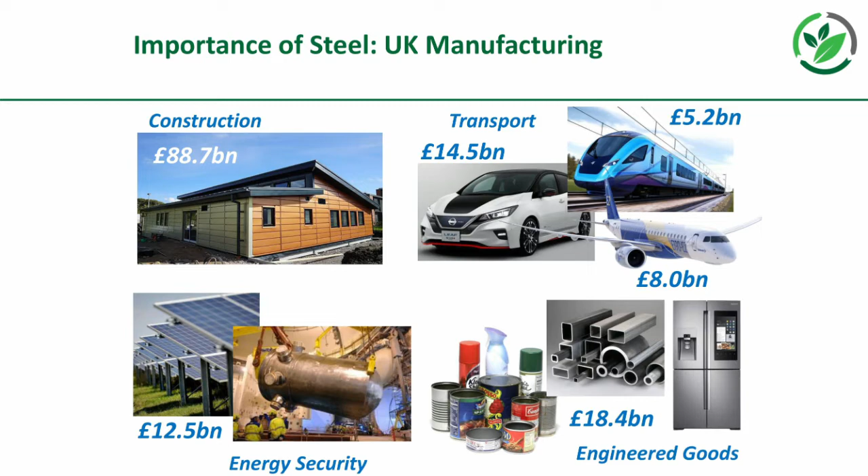So just as a quick intro, for construction you can see the numbers there - 88.7 billion. Energy security, 12.5 billion. Transport, 14.5 billion - 5.2 billion for your trains, 8 billion for your aerospace. And then you've got your commodities, your tubing and packaging, engineered goods, 18.4 billion. So that adds up to quite a long telephone number. And without steel, our economy wouldn't exist, basically. Our modern day existence, the nice lifestyle we have, the freedom of transport - everything is all based on steel.

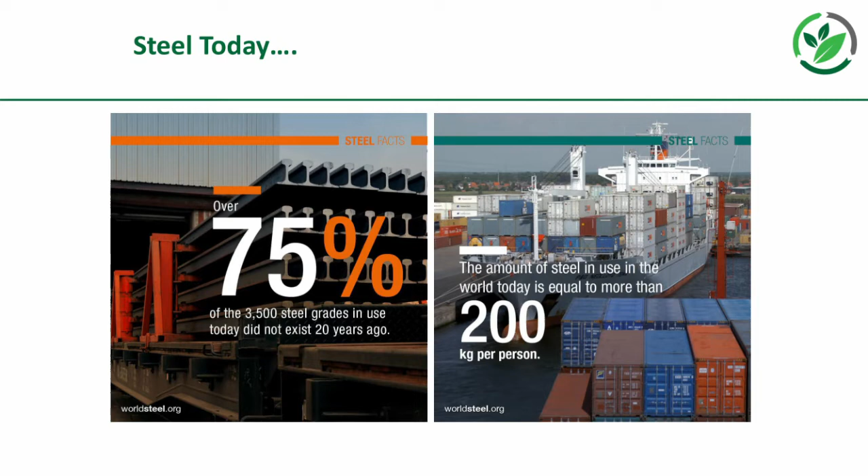So some more facts, taken from the World Steel Organisation. 75% of the 3,500 steel grades in use today didn't exist 20 years ago. Within that 20-year period we've developed all of these grades. I'm going to go back and ask, do we really need all these grades? Because all the elements added to give them these properties make them far more difficult to recycle. We might have to take a step back, have thicker car body parts, things like that. And the amount of steel in use in the world today is 200 kilograms per person. It's unreal. So just take those numbers into account.

There'll be no electric mobility without steel. It's an essential material for construction, and we really need to see if we can reduce the amount of carbon, because it's so widely used, so ubiquitous. The amount of carbon is roughly twice the amount of steel we pump into the air. We're talking over 2 billion tons of carbon dioxide pumped into the air all the time, and we really need to do something about that.

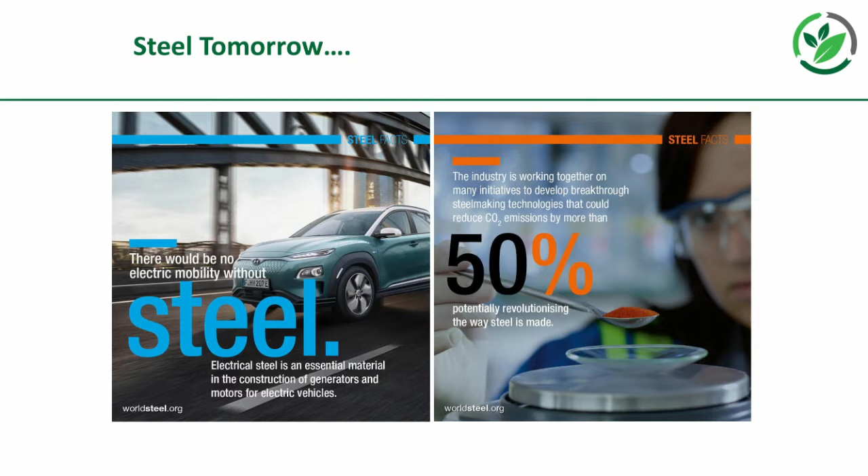If we look now at the UK and the Kyoto target, the blue line is our emissions, and it looks as though we've dropped below that target, but in reality we haven't. We're offshoring a lot of CO2, patting ourselves on the back saying we're doing such a good job, but in reality we're closing down production, losing jobs, losing control in this country, and then offshoring it. So we're not actually having an impact on the CO2, not keeping control of these things.

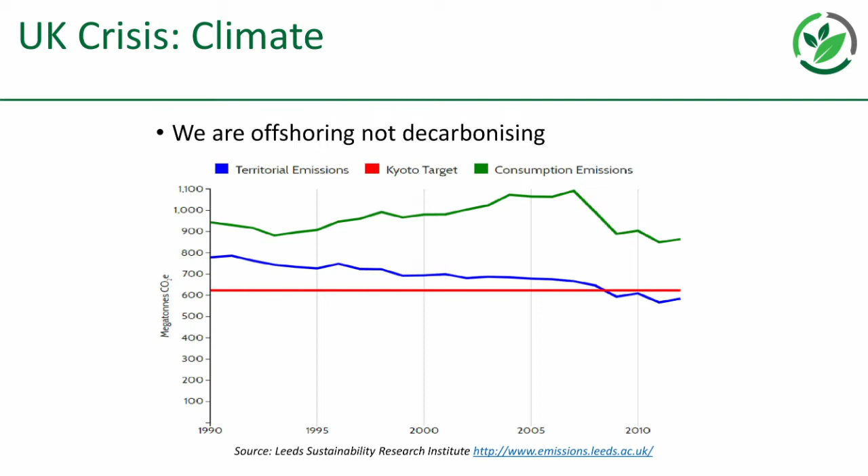It's the Western world, the UK, the States and Europe, that's going to make a difference. I don't think the Chinese and Indians are really focusing on that, they're in a totally different stage of development in terms of industry than we are. We saw recently with the climate convention that wasn't the case. So we need to keep control and make sure we do actually lower the CO2 we emit within the UK.

Another thing not going too well is the energy crisis. As part of this offshoring, we're shutting down power plants and reducing the CO2 we put into the air, but we're not going to be able to cope with the next generation of electric vehicles, electric trains, electric industry. So if we shift from blast furnace to arc furnace, are we really going to be able to cope with that?

Recently in the European electric steel seminar series earlier this year, several companies, one being Liberty Steel, who are having some problems other than this at the moment, were reporting that they were getting spot changes in electricity prices through demand, going up orders of magnitude within days or hours. So they have to stop production.

If we look at the graphs here - if you're interested, it's all published online by Dr Grant Wilson from Birmingham, who keeps a log. This is a bit behind the times, I apologise, but if you look at the most recent data you can see the drop in liquid fuel use around the 2020 period, and you can see how that's picked back up again, but that's due to COVID obviously.

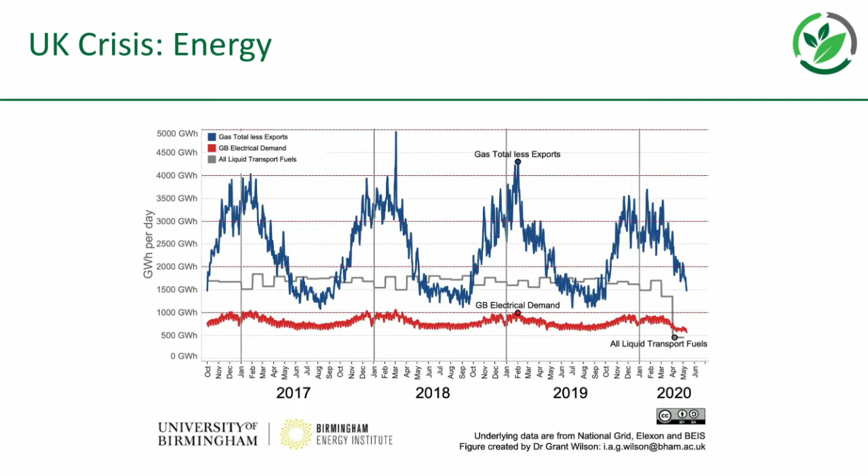On one of the final slides I'll add how that is going to actually stop us from hitting the targets we need to hit, but I'll get onto that later. And of course we've got the plastic crisis as well. We're using a lot of plastic across the world, and it's all being thrown away, ending up in the oceans, landfill, things like that. It doesn't degrade - it's a carbon source.

It could be a second bite of the cherry. We could use carbon capture and utilisation with that. And the other problem we have, that I haven't put a slide up on, is fossil fuels. So the oil we use for petrochemicals and pharmaceuticals, plastics, that sort of thing. If we stop oil production, we're going to have to get the carbon from somewhere else. So where do we get that from? Can we use CO2? Can we get the carbon from the CO2 to actually replace that?

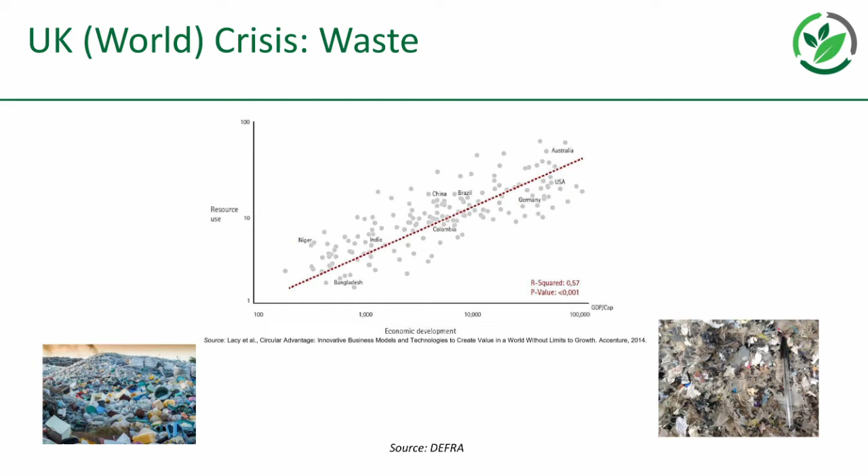It's one of the projects in Sustain, as you'll see, but we've got a lot of work to do to get where we need to be. Sustain's part of a bigger set of projects that include Comet and the Rapid Alloy Prototyping Project based at Swansea. We also have, so that's developing new alloys, new alloys with more additions, and also alloys with less additions, where we use heating and rolling techniques to get the same properties without using these alloys.

We also have the specific project, based on printable photovoltaics, rather than making them from silicon, which is very damaging to the environment. You've got to dig the quartz up, you've got to process it, it takes a lot of energy to do that. Some photovoltaics, you'll actually get less energy out of them at the end of the day than you put in to make them. So having something that's polymer-based, inkjet printable, printable on steel, which has been trialled successfully, is one of the alternatives.

And the ABC project, Active Building Centre - there's been a street of houses put up for low-income families in Neath as a trial, where they have basically zero energy bills due to novel uses of steel for heating, and also a technique using a salt with vermiculite that has an endothermic/exothermic reversible reaction - basically a water absorption reaction. In the winter, when the cold, wet air comes in, it starts the reaction off, and in the house they get hot air, warm air, and then in the summer it dries back out again and has a cooling effect. So it's little bits of technology like that all put together.

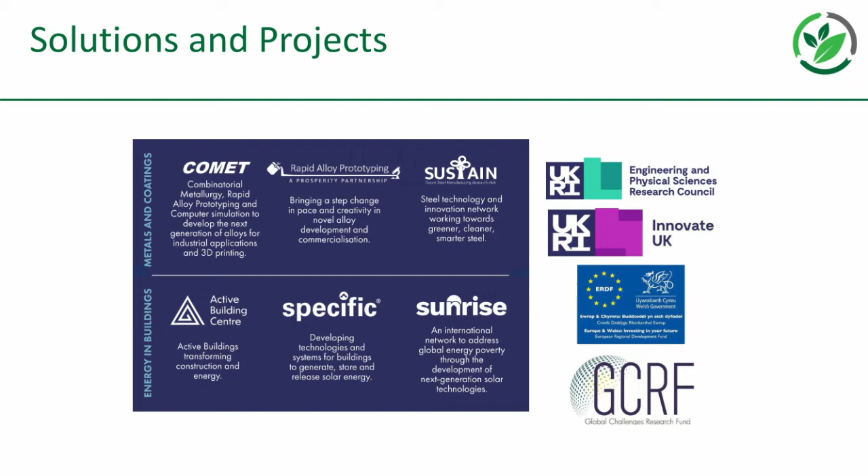So more about Sustain. We're very lucky to get Sustain. It was an EPSRC project, and EPSRC don't usually invest in steel. So it's government funding, low TRL, and it's a 7-year project. We're about 2.5 years through now, and it's 32 million over 7 years. 12 million is from EPSRC, and the rest has come from industry and local authorities, things like that. We've got all of the major steel companies in the UK - Liberty Steel, Celsa, Forgemasters at Sheffield, British Steel and Tata Steel are all part of that project, and they've all invested quite heavily in it.

And the point of the project is to do two things - we've got two grand challenges. The first challenge is to basically find a solution for net zero steel making and net zero carbon steel making, and also what we call smart steel making, using the latest digital technologies to link things together - supply chain, artificial intelligence - to actually make the processes more efficient in terms of energy use and other things as well.

So the project itself started with the core of Sheffield, Swansea and Warwick. Swansea's what we call the hub, and Warwick and Sheffield are the spokes. And as the project's grown, we've increased.

So Durham University - Andrew Gallant, who's giving a presentation in the future, him and Alton Horsfall have been developing high temperature technology for measurement in steel. They've got up to 700 degrees without water cooling, no power - it's an RFID type system - and they're working on technology that will provide similar sensing at up to 2,000 degrees without damaging the electronic components. So it's quite novel technology, because steel's one of the industries where it's so hot that you can't use the same measurement and analysis techniques as in other chemical-based industries. So that'll be a big gain, plus the digitization that we're bringing as well.

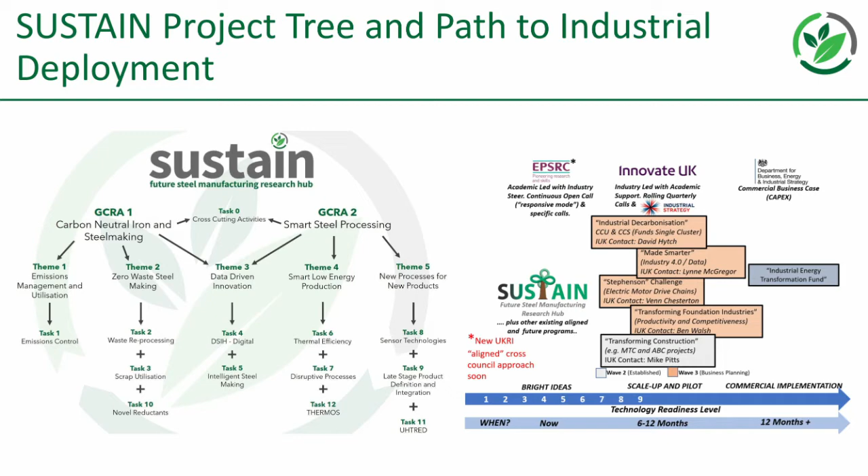So our motto is steel's not a problem. Steel's got this Dickensian connotation to it, and it's seen as a big problem - let's just shut all the plants, because if we do that, then we'll get rid of the CO2. We say steel's a solution, not a problem, and it can be part of a solution to decarbonisation and the climate crisis.

By basically valorising the internal waste, reprocessing external byproducts - you can see the list of projects here - becoming decarbonisation hubs, increasing scrap recycling, and we're going to provide a solid base to build a smart steel future by integrating conventional modelling and data science, game-changing sensing technologies, and novel metallurgical processing.

So we see ourselves as being potentially a solution to a lot of the problems that we have in the UK at the moment.

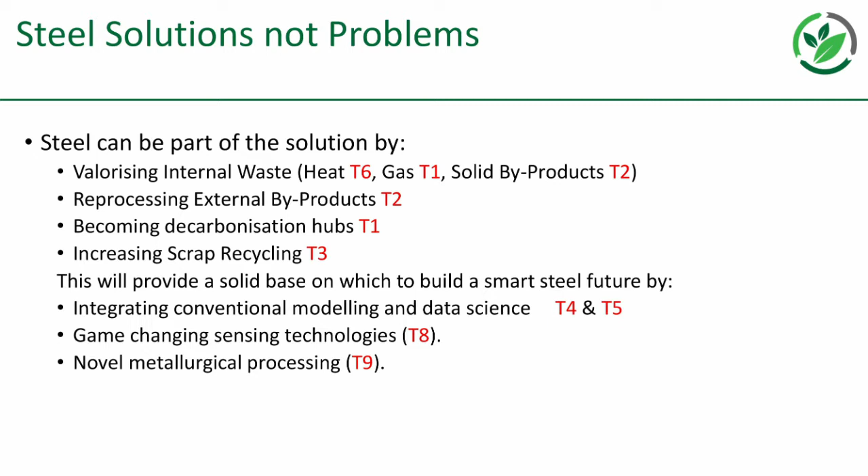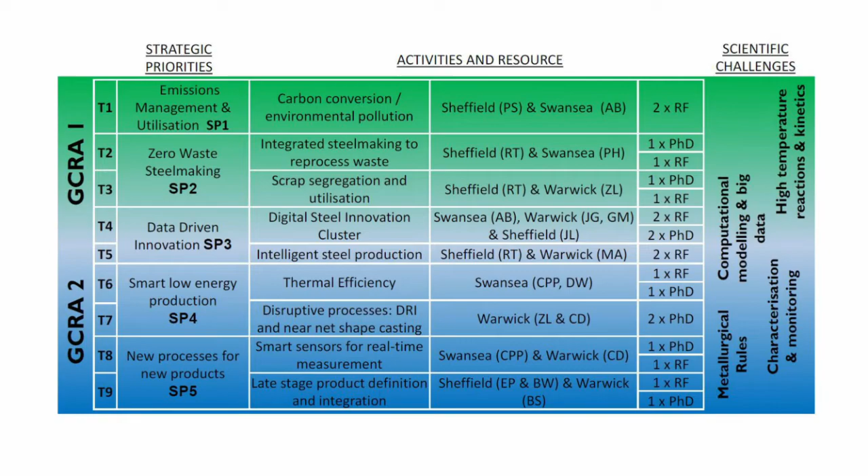This is just a quick slide to show how we're doing as a project. The slides will be shared, you can read through those later. And another list of the projects there.

So now I'll start with some of the interesting stuff. Task 1, the Carbon Conversion Environmental Pollution Project, led by Andrew Barron and Enrico Andreoli at Swansea and Peter Styring at Sheffield. Basically, the whole point of this is can we sequester the carbon dioxide and use the carbon embedded within it for other things.

So it's a two-step process. You need to get it out safely, you need to make sure that you get rid of the nasties, and then you can start doing something clever with it. There are various technologies being used at the moment, such as amine technology, which aren't suitable for steel making because of temperature and pressure swing issues, and the nasties in there can damage the catalysts that do the clever stuff with the material as well.

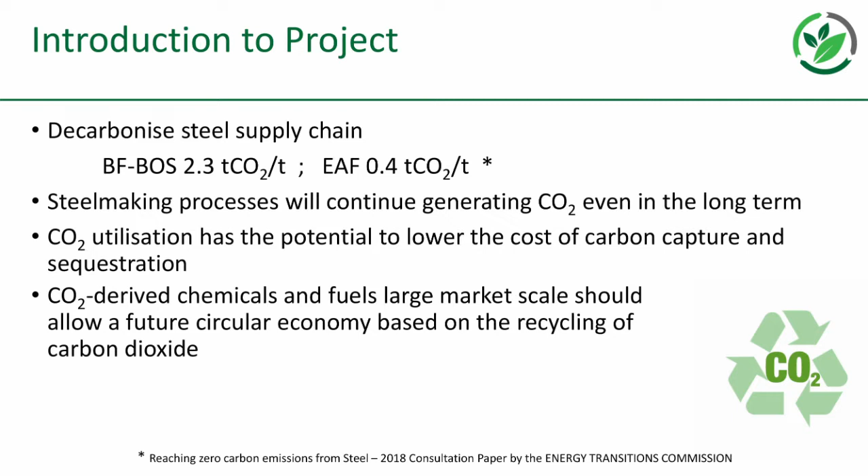We then need to find either bio or electrochemical ways of producing the useful products to replace things that we currently use carbon from oil for - basically take the carbon dioxide from the steel industry and turn that into fuel and chemicals.

And the great thing about steel is it's a fantastic point source. You hear in the papers about companies taking carbon dioxide from the air, but there's a very small percentage of carbon dioxide in the air - I think 400 parts per million at the moment. Wouldn't it be much better to go straight to the source and suck it all out where you've got a very high percentage of carbon dioxide, rather than wait for it to get into the air, diffuse, and then try and pull it out.

So that's what we're really going for. In the UK, we've only got two integrated steel plants now, unfortunately - we've got Scunthorpe, now British Steel, owned by Jingye, a Chinese company, and we've got Port Talbot, which is Tata Steel, owned by an Indian company. But they're still going, still in the UK, still making steel.

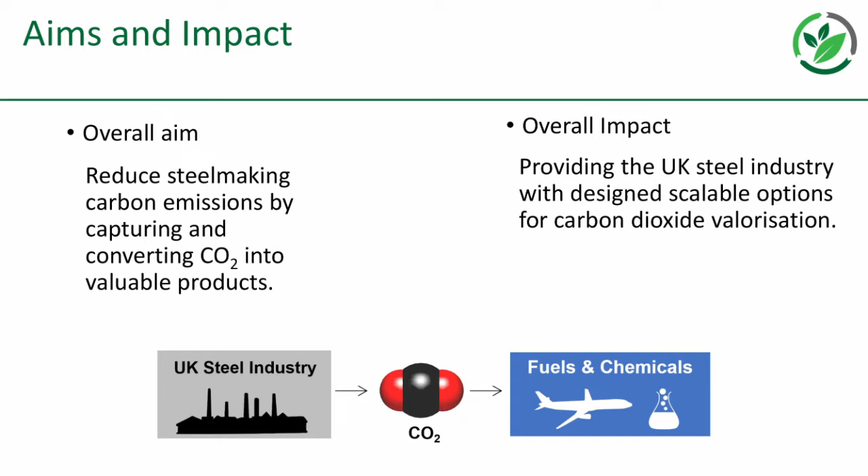So we've got two sources that we can stick these systems on, and we can start to prove to the world that you can actually have integrated steel making and use the byproducts for useful things rather than letting them go into the air and vent off.

So the aims and impact of the first part of the project: develop, build and operate a pressure temperature swing adsorption unit with purposely designed sorbents, higher CO2 separation selectivity, lower energy penalty, and deliver separation units and sorption materials for efficient carbon dioxide capture from gas mixtures specific to steel making.

So this project's been going for a couple of years now, and it's reaching its maturity. It's getting to the point now where it's either going to be spun out through an Innovate project or given directly to industry.

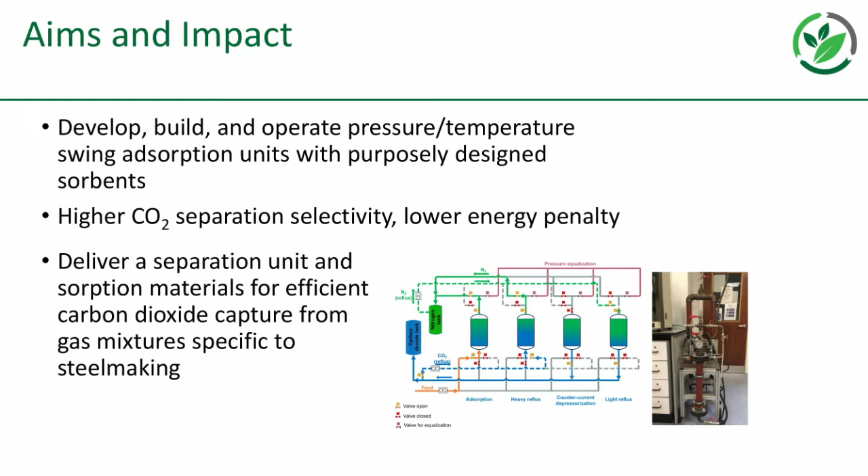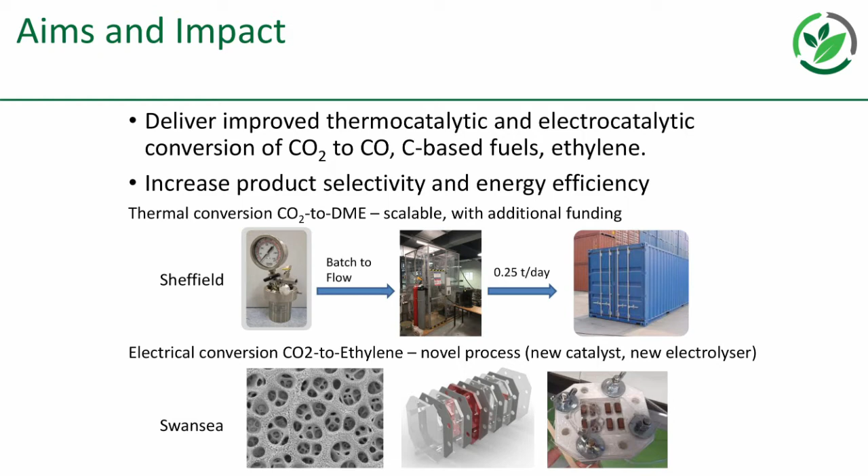The technology that's used - initially they started with electrical conversion of CO2 to ethylene using a catalyst process, and that was proven to be very successful. The energy used is far less than a lot of the other processes that are currently used today or in research today.

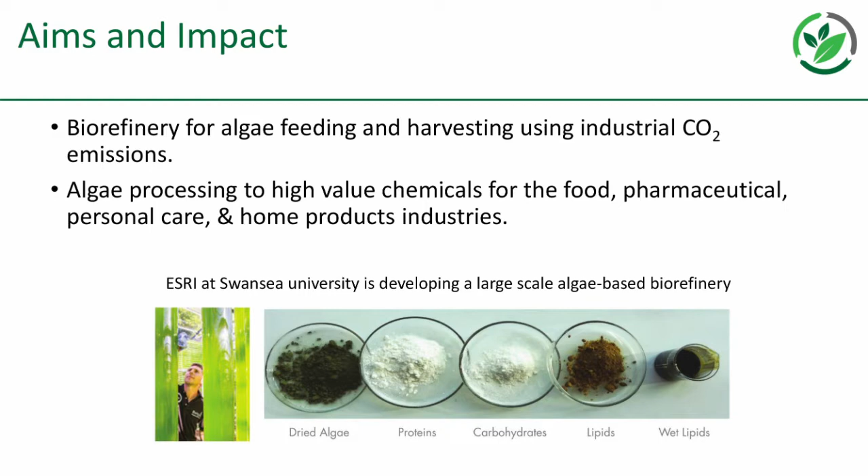And then they were also looking at bioreactors as well. So you basically have a big tank full of algae, you pump the CO2 in, and they're converted into various things that you can then refine and make into useful products.

So where this is now - the capture side, the non-amine based technology is actually suitable for variable pressure, and it's going really well. They're at a stage now where they're building, it should be finished in the next few weeks, a demonstrator, and that'll be doing a tour of the UK. It'll be going around different plants, different steel plants. They're actually going to go outside of Westminster and pull it out of the air as well, just for giggles.

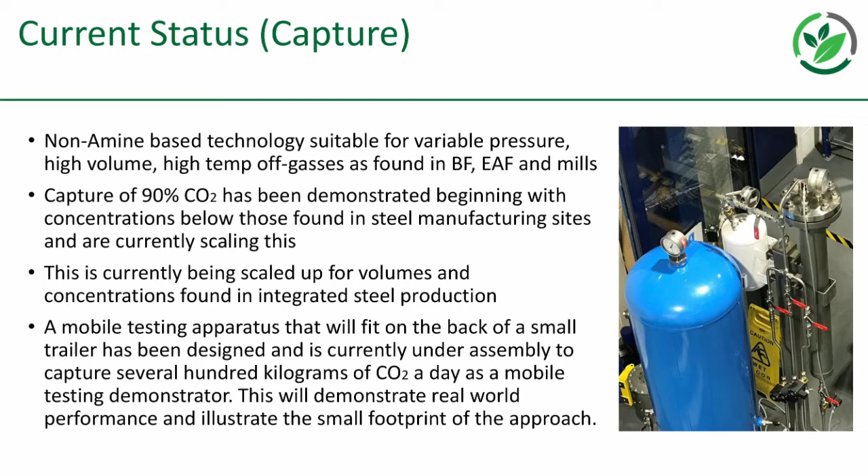But it's at a point where we can really start to get the message out, get the investment into the project, and start to scale it up. But the actual proven side of it's pretty much finished.

And then on the utilisation side, there's a successful setup. I mentioned the ethylene production through the catalyst, so that's been proven. And then we've got this other system with the algae - there's a bioreactor set up in Vale, a nickel refinery in South Wales. And yet again, it could be put on skids and be moved about, and that's going to do a tour of some of the steel plants as well. We hope to put both of the units together as a full demo, and then take it from there.

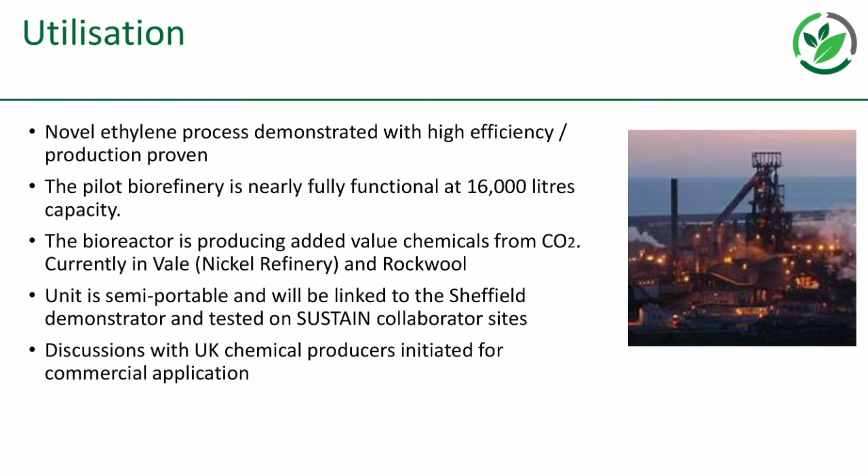So this is a system that'll take the CO2 out of the blast furnace or the mills or the BOS plant or wherever, and actually before your very eyes, convert it into something that's useful and can be used. But like I said, I'm not sure if I would eat the protein that they make from the algae.

So the second project I want to talk about - again it's a Sheffield Swansea project. The two researchers are Ulrich Jones and Fazwaz Ojabali, with Richard Thackeray as the primary investigator at Sheffield, and Peter Holliman at Swansea. What they're looking at is, can you use plastic waste basically in some sort of process form? It's actually plastic and paper, a bit of a mix.

So it's stuff that would end up in landfill, stuff that we throw out probably every day within the green wheelie bins or whatever, or the blue ones, whichever system we have. Basically that needs to be processed in a way that mimics how coal goes into the blast furnace. I don't know if I'm assuming everyone here knows roughly how a blast furnace works, but you do need to give it additional fuel, and they usually use pulverized coal.

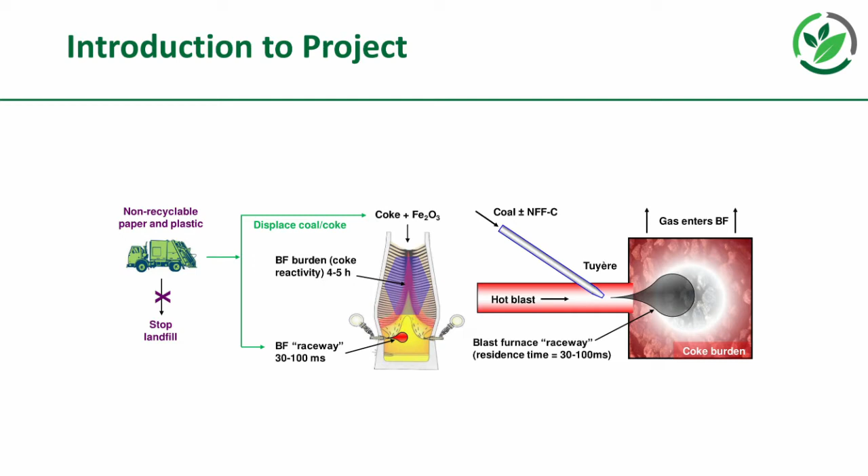And that's put through what they call a tuyere. This is a project where, on a lab-based scale, they've been simulating the tuyere and looking at how basically the carbon burns, and the differences between the pulverized coal and the stuff they're producing from plastics and paper. The idea is that there'll be potential financial savings.

So landfill of this stuff is like £120 a tonne. So effectively you're getting a saving of whatever the cost of coal is for an equivalent amount of plastic, plus that £120 a tonne you would normally pay for landfill. So there's a financial saving, but also a carbon saving.

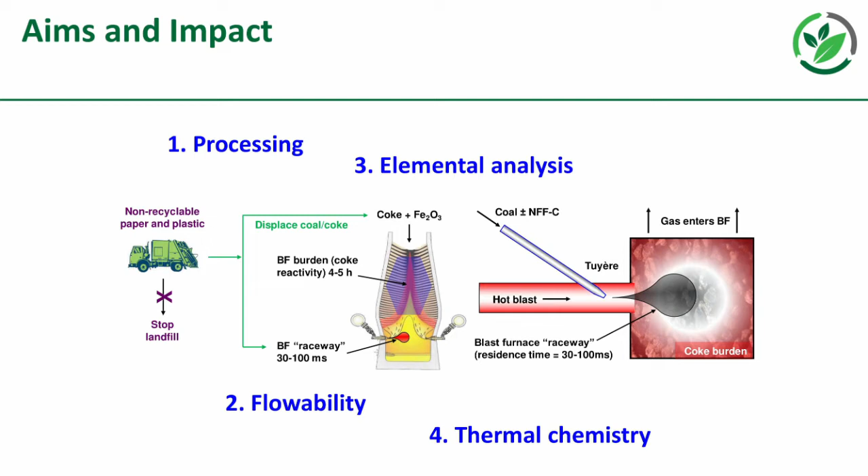So if you then combine this with the previous technology, you've got something where you've got the second bite of the cherry from the plastics and paper, and you've also got the ability to pull the carbon out and reuse it again as something else - as a protein, or you could even make plastic again out of it. The idea is you'd have that efficient cycle - you won't have to keep using oil, and you won't have to keep getting virgin materials and putting it through the process.

So the next project is wholly a Warwick one in terms of the practical side, and Richard from Sheffield's working on the LCA analysis, that's life cycle analysis side. He's looking at, instead of what's usually done today with cars, where for many years they've been doing the life cycle, and that's where the weight of cars comes down by alloying the steel in a certain way to give it higher strength, so you can have thinner steel with the same ductility, and reduce the amount of carbon dioxide put into the atmosphere by the reduced weight of the car.

What Richard's doing is rather than look at one life cycle of a vehicle, he's looking at an infinite life cycle. That brings questions in, because if you then have to recycle it, it becomes more difficult because you've got these alloying elements in, and you could get to a point where you've got a negative gain. So this is all integral to looking at the far future rather than just the next 5, 7, 12 years.

So there's the scrap project at Warwick. As I said, I'm doing some of the things on scrap as well. But the main thing is to look at the UK generated steel scrap and actually use it in a way that's strategic for the UK. As I'll come on to later, we actually have a surplus of scrap compared to the amount of steel we make. Unfortunately, we still use more steel than we accumulate scrap every year, by a factor of about 2. So that will start to level out - the amount of steel we use will come down, and the amount of scrap we generate every year will go up, and they'll meet at some point.

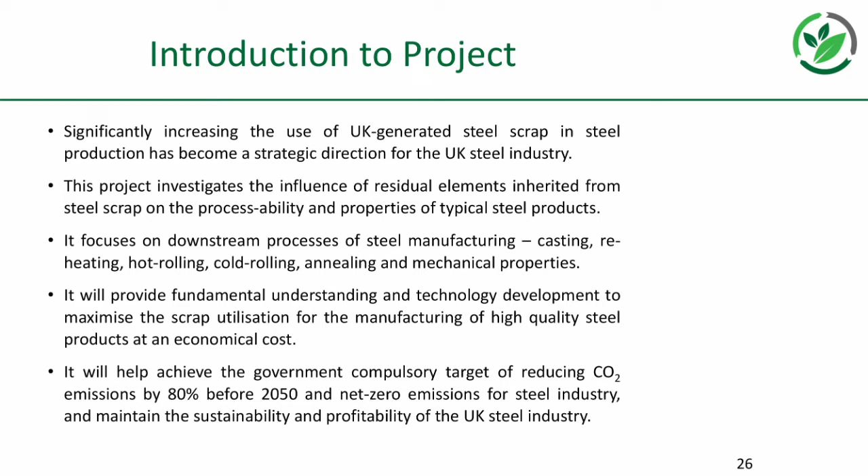So I don't know if anybody knows how tin cans are made. Basically, they get a sliver of steel, like a beer mat, and it's punched out into shape in one go. If you have too much copper in there, it hardens the steel, stops it being as ductile in certain areas, and then you get cracks, splits and tears. They want like 1 in 10,000 to rip - that's okay, but if every 3 or every 1 rips, then you've got major problems, and they'll just send the steel back.

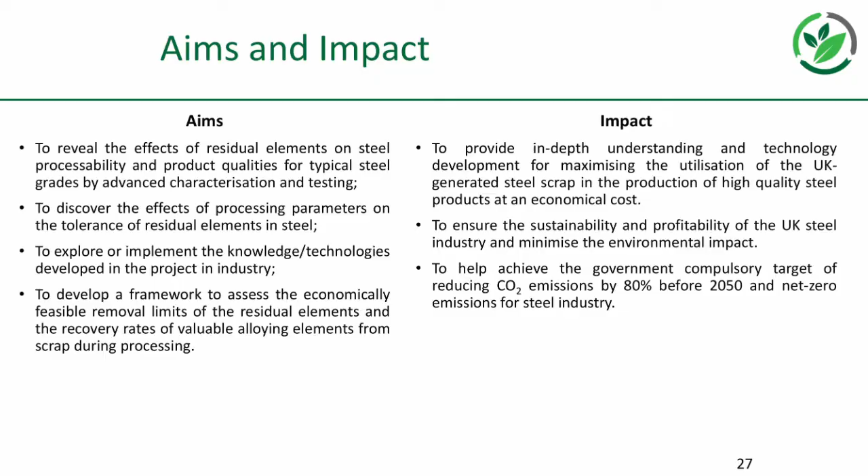He's looking at not only generating electrical energy from the heat, but also how we can extend the lifetime of refractories as well. And yet again, refractories come from virgin materials dug out of the ground, so can we find some way to reuse them? Usually what happens is they get mixed up with some of the slag and used to make tarmac for roads, that sort of thing, or it's landfilled. So yet again, it's another waste - we're digging something up, using it, consuming it, and throwing it away again.

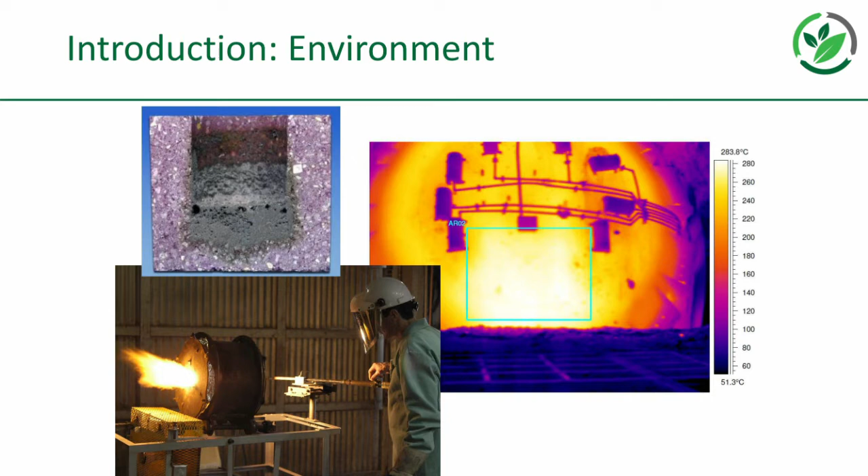So that's just a picture of the thermopile, the refractory thermopile that would be installed within the refractories of a ladle, and then obviously you generate a voltage from the temperature difference, and if you have enough of them stuck together, you get a parallel sort of current from that which increases the current.

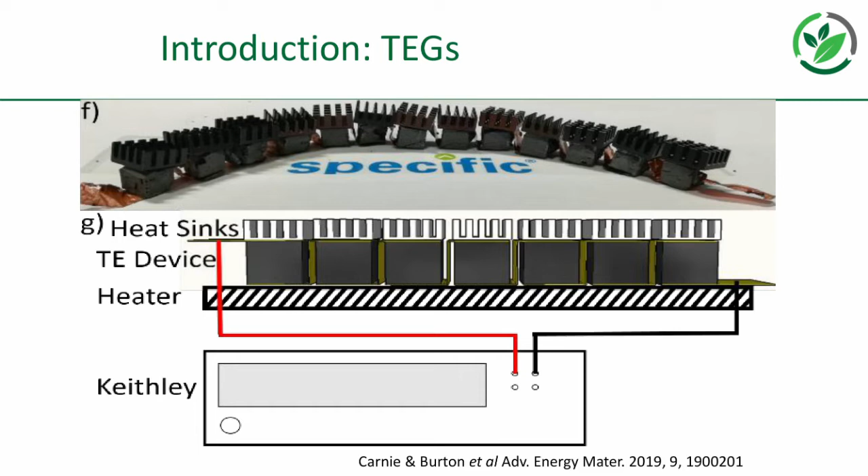So it's basically - I'm trying to think of the word now. Oh, it's gone. Anyway, you know, like a temperature measurement system where you've got two metals. Thermocouple, that's the one. Yes, thermocouple.

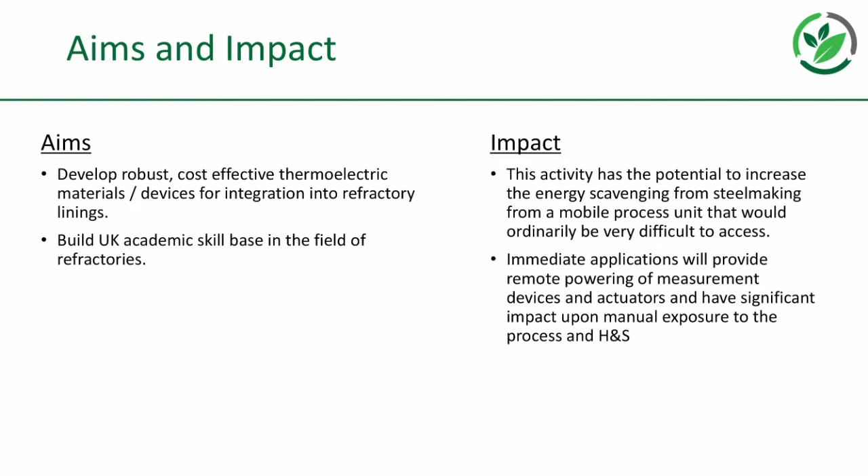There's a lot of problems with hydrogen-based technologies. One of them is actually getting the supply of hydrogen, especially if you're not going to use natural gas to do it, which is wasteful. You can do it through electrolysis, but it's roughly 60% efficient, so you're losing 40% of the electricity you're putting in. You might as well use electricity and melt scrap if you're going to do that. There's that side of things, but also hydrogen behaves differently to natural gas, and you've got a lot more water formation within there, which can cause problems as well. So Zushu's got a PhD looking into that at the moment, and we're linking up with world leaders who are really looking into the uses of hydrogen for DRI, trying to learn as much as we can about it and bring the knowledge into the UK.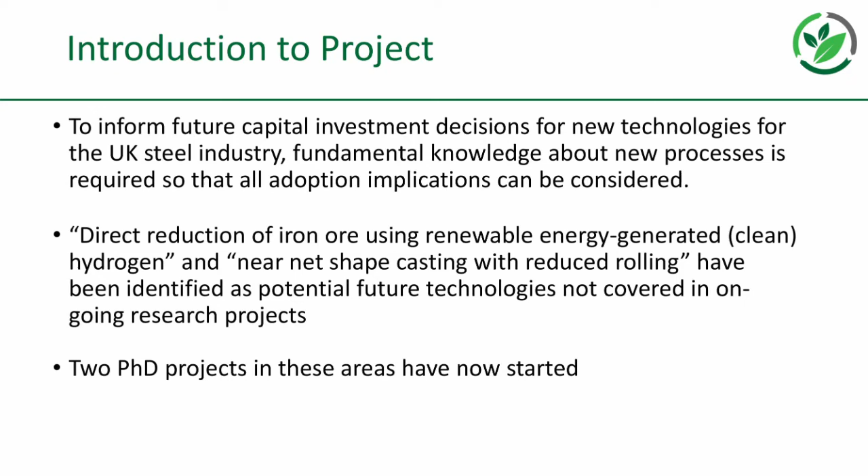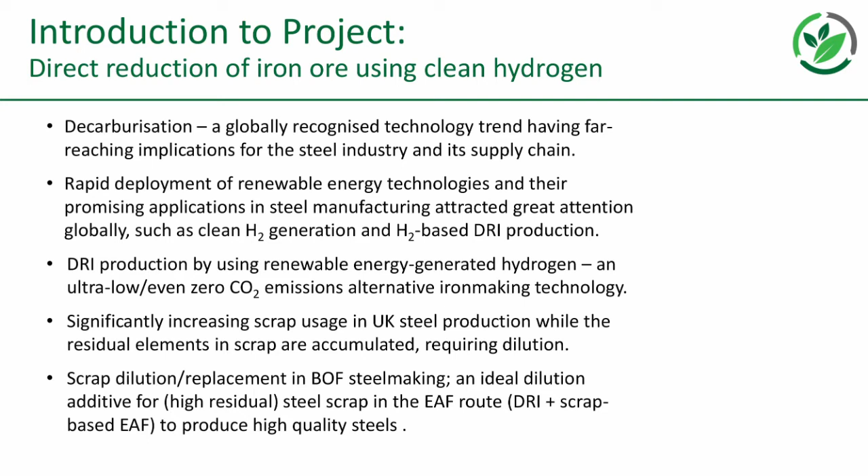And then we've also got the other project, which is looking at different forms of casting that can be more energy-efficient, but also overcome problems you might have with traditional casting methods in terms of casting highly alloyed metals due to residuals from contamination from recycling.

And then the last one I'm going to quickly talk about is this late-stage differentiation and integration. This is a wholly Sheffield project in terms of the practical side, and then there's a PhD working at Warwick with Martin Strangwood. Mark Rainforth there, really good guy - he's a world leader in this sort of thing, does a lot of work for the nuclear industry, that sort of thing. And one of the spin-outs of this project is actually going into the Neuron project, which is looking at nuclear fusion. And Eric Palmiere, yeah, again, he's another world expert based at Sheffield.

So it's all about improving product uniformity along length and cross sections, microstructural evolution during hot deformation, and novel innovative heat treatment to reduce heat treatment costs, with and without alloy design. What's happened over the years is we've gone away from mechanical and heat treatment and, I wouldn't say cheated, but we've put what we call microalloys in there that give you the properties you want without having to invest in roller mills and heat treatment.

This was something British Steel really pushed back in the good old days, before it was Corus and then Tata. As a cost-saving measure, it was a short-term win, but long-term it hasn't really benefited the company, I don't think.

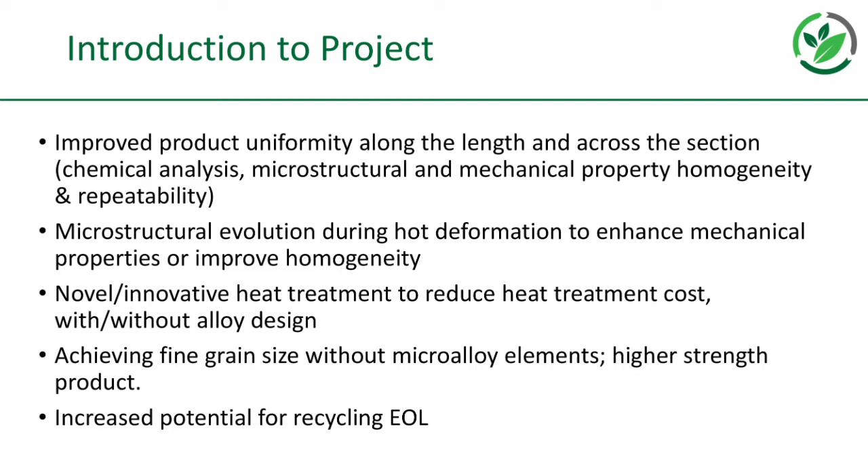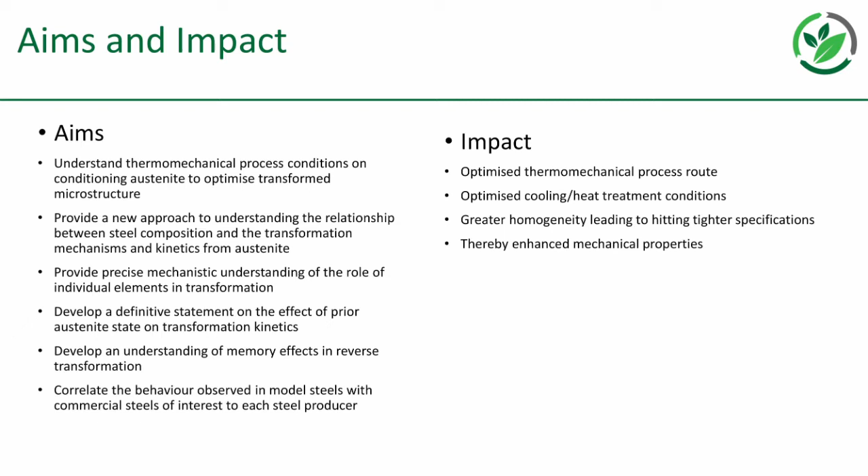And looking to the future, looking to recycling, it's definitely not the right model, because we're increasing the amount of contamination within the steel that we need to recycle. The last point is increased potential for recycling - if you can control the grain size and properties of the steel through heat treatment and rolling, you don't need to add all these elements, and you don't have the problems you'd have otherwise with these alloying elements when it comes to recycling.

So steel is a solution. I've covered some of these things already, but plastics and paper can be used as fuel. We can couple that with carbon capture and storage utilization to minimize emissions - something we're really focusing on in sustain.

And then we've got greater utilization of steel as a packaging material - something we're really promoting because steel's so versatile and so recyclable. Why would you use things like plastic? The cost is potentially lower, you can get steel to a really thin state that's going to be light, it's going to be useful.

I think we've seen that a lot more - there's a lot more packaging now. I've seen cans of water on the shelves and things, just moving away from that overuse of plastic. I don't think we'll have steel carrier bags, but I don't know what we're going to do with carrier bags, because they just seem to be everywhere, don't they?

But as I say, I think steel itself can have a massive impact on the plastic crisis that Attenborough sort of brought forward a few years ago. Because if you look at the state of the streets, look at some of these pictures of quite exotic locations, the Arctic and stuff, it's absolutely covered in plastic. It's destroying marine life. Some of these plastics break down into nasty chemicals that mimic hormones and are causing issues not just in wildlife but in human beings as well.

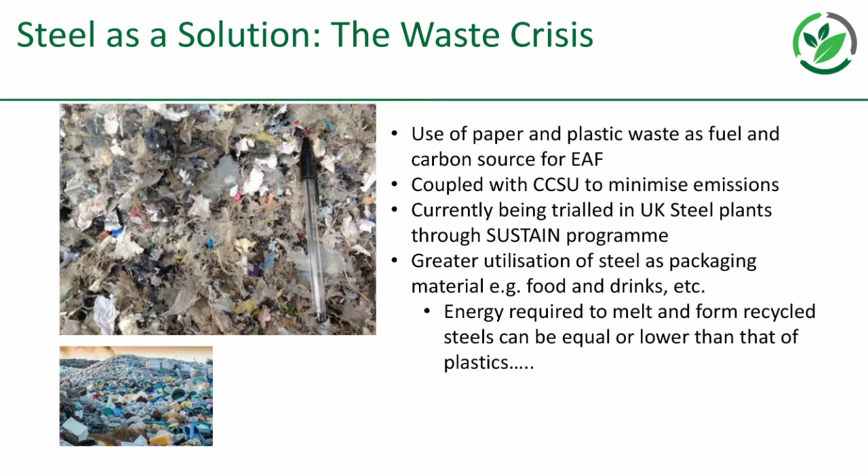So the circular economy.

Recycling versus mining, transport, virgin steel production. If we really look into the decarbonisation side of things, if we can use our own natural resources in terms of scrap and waste, we don't need to start bringing virgin materials right the way across the globe. We get our iron ore from Australia, coal from Australia and various other places - what's the carbon impact of that?

I didn't think it was controversial, but a lot of people - I was on the side of that Cumbria mine opening, because it's bringing jobs, it's less transport, and all, as you saw on that graph earlier, we're really doing is putting the burden on other countries and saying, oh, what a good job we're doing. We're still using the same amount of carbon, so why not use our own natural resource?

And obviously, I come from a coal mining background - grandfathers were coal miners at Horden Colliery. If we do it right and capture the carbon at the end of it, is that so bad? It's better than all the stages of digging out of the ground, transport. When it's dug out of the ground in some of the third world countries as well, I'm not sure if that's the correct term anymore, but you don't know what the conditions are - you could have child labour, you could have all sorts of things going on.

At least it's under control, health and safety is right, the transport costs are really low, and we're using our own sovereign capability. And if you look at what's happened after COVID, that much reliance on China for things - we need to start bringing things back into the country, because if they switch the lights off, we can't switch them back on again.

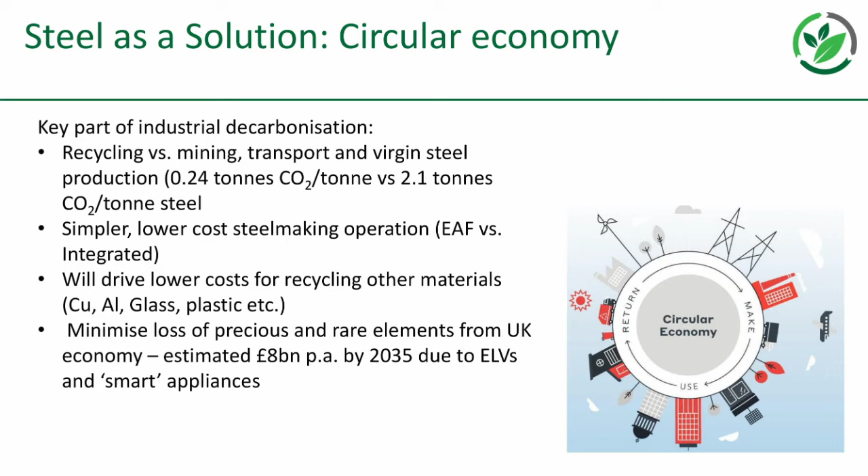So, yep, carbon capture and reuse. The oil industry is really negative now, it's on its last legs - not because we're running out of oil, but because public opinion has shifted against it. All you can see is decline, and fuel prices going up, it's going to be crazy. We need to start really looking at what we have at home and how we can reuse that for practical means.

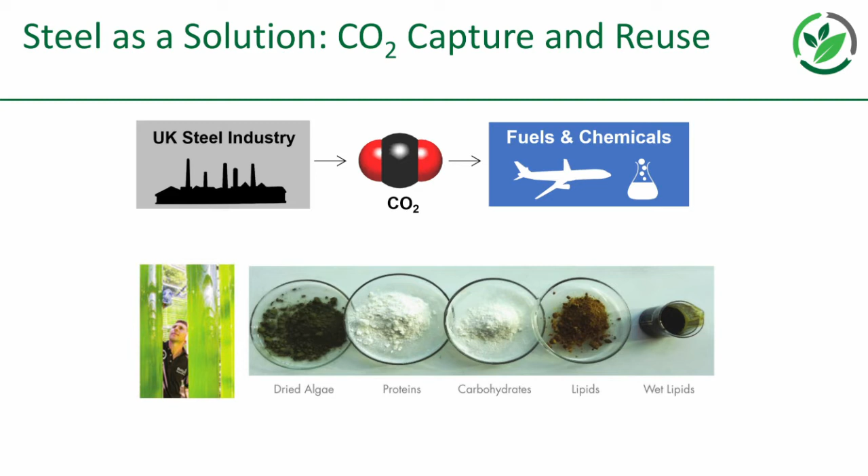And then the hydrogen economy - one really interesting thing about the blast furnace is you can actually use it to generate hydrogen. Tata Steel was involved with and championing the SEWGS process, which effectively reacts CO with steam to produce hydrogen. The calculation was something like 300-350 megawatts of hydrogen for a large blast furnace. Compare that to the Fukushima Hydrogen Energy Research Centre - 180,000 square metre site, cost $2 billion, and they get 10 megawatt hour H2 output, which powers about 60 cars. So just an investment of $500 million, and you've got orders of magnitude more hydrogen, and we've already got the blast furnaces. Why don't we utilise them for that? Kickstart the hydrogen economy, rather than wasting money on renewables that aren't maybe as developed as they need to be.

And then you've got to think as well, why not just use the electricity? Because 60% of it is going to be used to produce the hydrogen, the other 40% is lost. So to me it's a no-brainer, but it's quite difficult to convince people it's the right way forward.

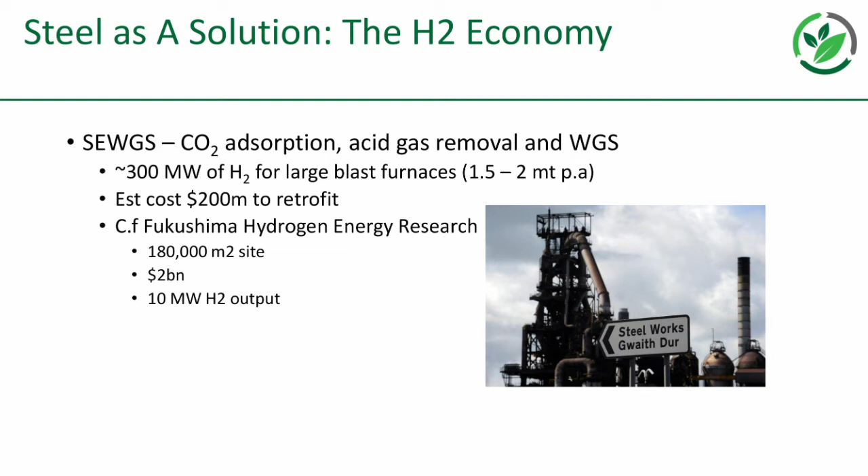And then steel for nuclear fusion - that's the new thing. Was it 2070? They said we might have a reactor that lasts 5 minutes or something like that - they've proved it lasts so many seconds. And obviously fission as well. This is another one people hold their heads at when I mention it, but we've got an opportunity to use these small modular reactors, and to produce them we need steel. So steel could be a solution for that. We've roughly got about 500 years of energy from depleted uranium - that could be enough to get us to the next stage. I really do think we're going the wrong way in terms of shutting the lights out with fossil fuels well before we're at the point with renewables that we can actually rely on them and produce them with an amount of energy significantly less than it takes to produce the things in the first place.

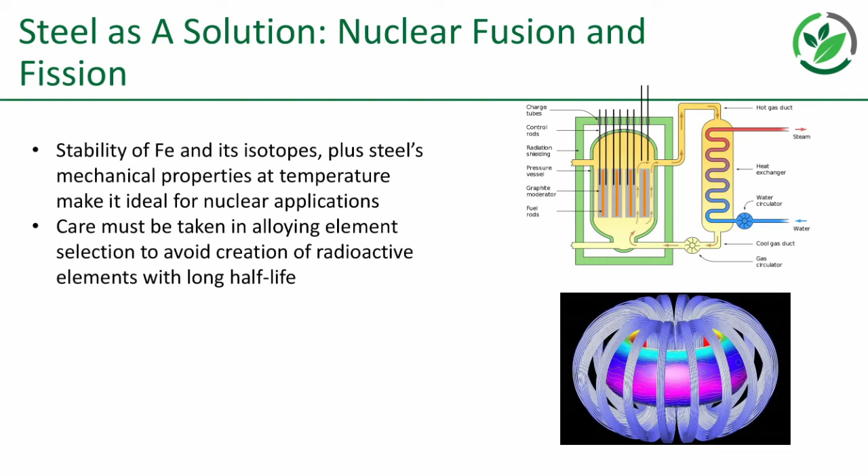So, future for the northeast of England - it's been quite dire. If you think back, there were steel plants at Hartlepool, Consett, Teesside obviously, and I was involved when they tried to relaunch Teesside as SSI, and it was quite sad to see how that went in the end. They would probably still be here if it wasn't for the steel crisis in 2016 that was caused by dumping. It was quite a sorry thing - they had a really good business model, but it's all gone now, and we really need to start from scratch if we want to bring it back.

And I think to do that, we need to start looking again at the UK. We've got a wealth of low quality virgin ores in the UK - the Cleveland Hills are still full of iron ore. It's not the same quality as the stuff you'd buy from Australia or elsewhere in the world - it's got high phosphorus, and I don't think the iron levels are as high as the premium iron ores you'd get from Australia. But it's somewhere to start, and there are technologies that have been developed to use that and take things forward.

We've got a surplus of end-of-life steel scrap - as I mentioned before, it's roughly 10.3 million tonnes of scrap generated every year in the UK. We only produce 7.2 at the moment, which is sad because it was 21, 27 million tonnes I think in the 70s the UK used to produce. So we're right at the bottom end, but that might be a good thing because it's better to build up than to scale down. I think the UK is in quite a good position, and we also seem to be very good at innovation and coming up with new ideas. When our backs are at the wall, we always seem to turn true. So I think we've got that going for us.

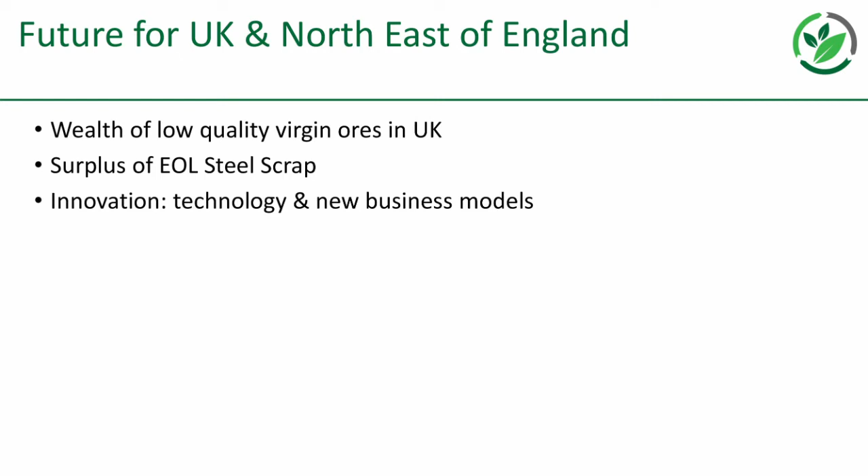One of the things I've been looking at is these different technologies and where they are in the technology readiness level. A lot of the technologies are quite low down in the TRLs, just beyond concept to pilot. The one at the highest level, closest to actually being realised, is to maximise scrap usage. That's somewhere I think we need to really focus.

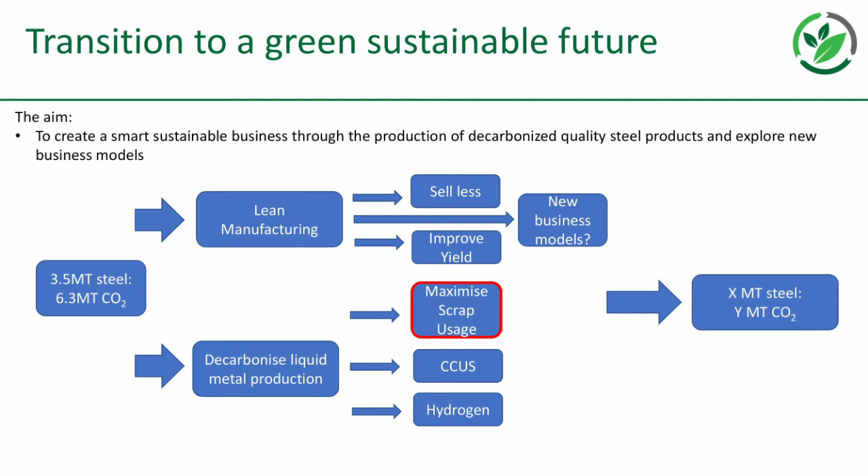If you look, this is again from the World Steel Organization, and you can see all the different amounts of steel that are exported, imported, and the tons produced in different countries. You can see the United Kingdom there - 7.2 million tons produced.

If we look at the amount of scrap that we export - we do use scrap within the UK as well, and we import some too - the number comes to about 10.2, 10.3 million tons. So even that number is higher than the number we produce.

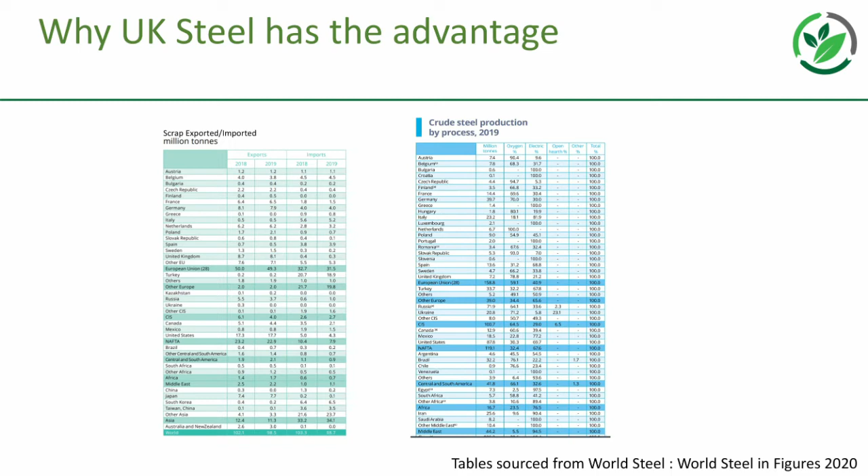So why don't we use our scrap as a UK sovereign resource? Here's a summary: we export 8.1 million tons, bring in 0.3. Our actual use is 21 million tons. So as I said, we are going to have to bring up the amount of virgin iron that we use. But it's definitely something we can use to kickstart and reinvigorate the steel industry.

It's also a much cheaper, much more green way of producing steel if we use arc furnaces, or even start using more scrap steel within the blast furnace. You can use up to a maximum of 20% scrap steel, as trialled, within a blast furnace, and about 30-35% in the BOS plant. When you add all that up, it increases productivity. You don't need as much carbon added to the blast furnace because the scrap's already reduced, so there are other benefits too - you reduce carbon consumption but also increase productivity.

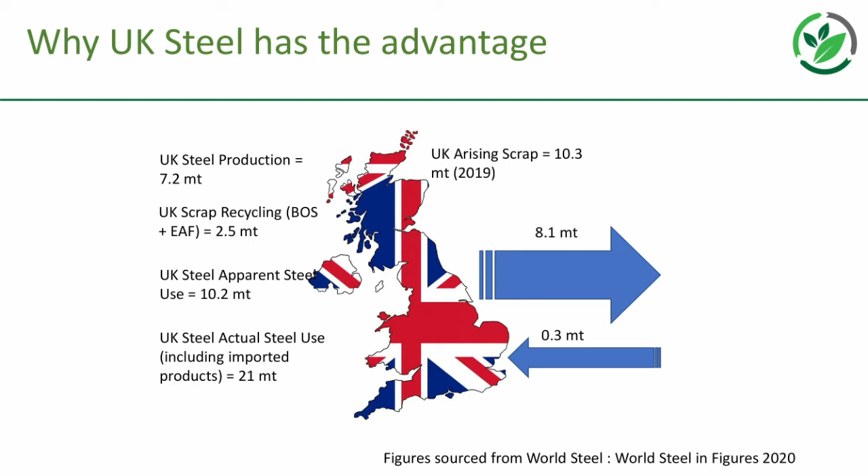So what's wrong with scrap at the moment? It's under-processed, and it promotes this material downcycling that I mentioned. At the moment, you can't really use 100% scrap to make car body parts or tin cans or the premium steel products.

The chemical composition of the steel scrap needs to be measured. We need to start either segregating at the source or having much more rigorous separation processes for the scrap we get in. I think eventually, in industries like cars, your Jaguar Land Rovers or your Nissans will buy the cars back, shred them up, and then it'll be separated and disassembled, so you'll know exactly what you're getting back in terms of the metals used in the vehicle.

But we're so far away from that at the moment. The design of cars and various consumer goods are all basically for assembly, not for disassembly. So I think that's going to take time to get us there.

Also, the use of very similar type materials, using heat treatment rather than alloys, will start to bring the steel grades into much less. Since 2000, over the last 20 years, we've got thousands of different grades of steel. Let's have 5, let's have 10, something like that, where you can actually segregate it - you're not really going to be able to segregate 2,000 different grades of steel. So we need to start pulling things together for that.

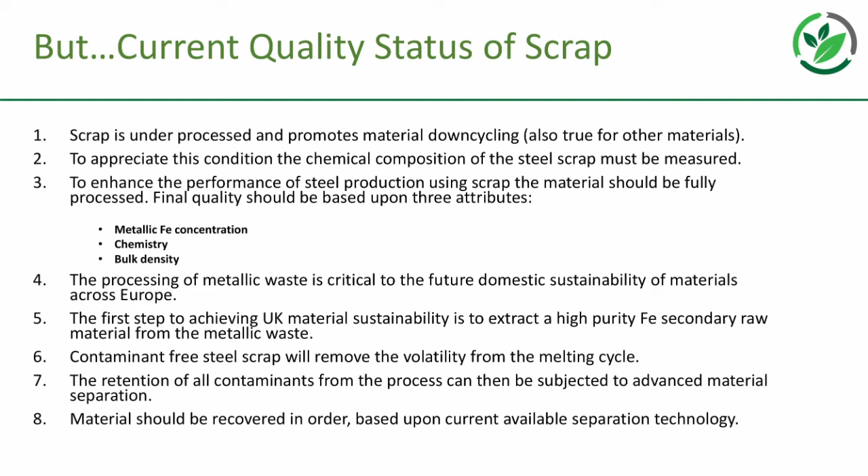So what happens to that? It ends up in the slag, or it ends up in the steel itself. It bulks the slag - that's more landfill, more cost. It all adds up with the overall profitability of the product in the end.

Just to give you an idea of what the scrap man shows - these are a range of grades, a scrap menu that you get from, and this isn't just the UK, this is global. You can see the percentages: 92% for the OA grade, which sells at a premium, right the way down to the carbon steel turns, which is only 70% Fe. The rest is oil, soil, other things hidden in there as well.

And what the scrap companies will tell the steel plants is that's the best you can get - you can't go any better than this percentage here. In fact, most of the steel companies think they're buying 98% Fe, and they're not.

If you do a quick calculation on the available steel - globally, 70% is made in a blast furnace - the only reason it has 0.05% copper in it is because you add scrap within the BOS process as a coolant, up to about 15% at the moment, and that has copper in it that gets diluted down. If it's any more than about 0.15-0.2%, then it becomes useless for making high-end grades for automotive. But that level of copper could actually be much lower if we're putting the steel in from a purer source.

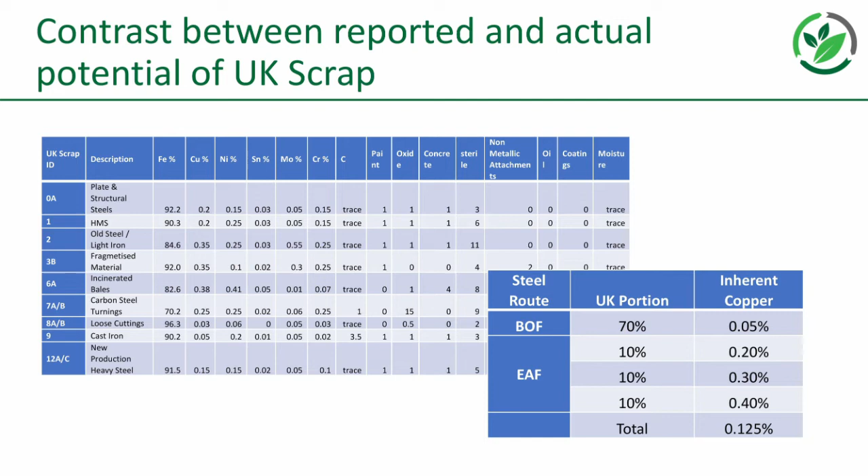So it goes from this to that if you do processing and extra processing, and it's just a matter of making sure you do segregation, that you shred it up into very small pieces, so you get the separation of things that are bolted, connected, welded, or brazed. If you cut it up into small enough pieces, all these things drop away, and you get less contamination.

And we need to ensure that we have adequate analysis. None of the steel plants or scrapyards do any analysis on the product as it's going through, so they've got no control. So the scrap that ends up going to steel plants ends up being quite variable.

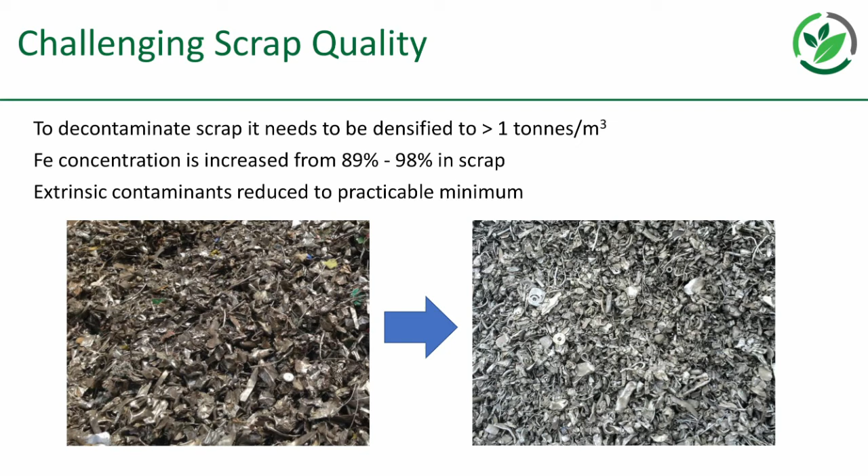So what we need to do is take that 10.3 million tonnes and process it correctly. We should have the right type of steel - the very low residual, high purity steels for high quality strip, then it doesn't need to be as pure for commodity strip. Specialty grades come next, then commodity long products, and rebar at the bottom. Rebar can have up to 0.7% copper, that's just what goes into concrete for buildings. But we've got enough steel to go around for everyone, and we need to ensure all of the UK's steel plants buy the right type of scrap for the product they make.

If they do that, there won't end up being a massive bidding war on scrap. Because at the moment, 70% of the steel produced in the world comes from the blast furnace, leaving only 30% for everybody. So if everybody switches to arc furnace, there's going to be a massive drive for everybody to buy scrap, and it's going to go through the roof. So we do always still need to have that virgin supply of iron.

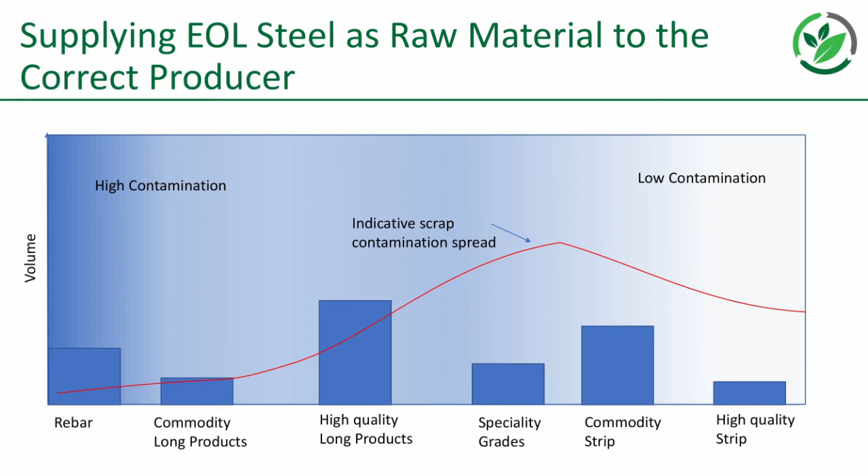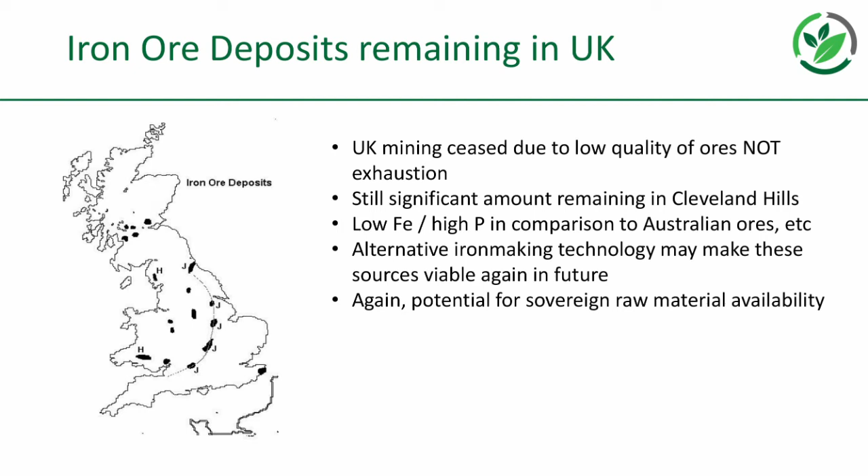Back to the UK and Teesside - UK mining ceased due to low quality of ores, not exhaustion, so we still have our own natural resources there. There's still a significant amount, lowish in Fe, high phosphorus in comparison, but there are technologies that can deal with that. It's all about sovereign control and bringing control back to the UK, not just for the foundation industries but also for manufacturing.

So these are a couple of examples. There's Boston Metals, an American company, they're looking at electrolysis. So rather than actually using a blast furnace or an arc furnace, or producing HBI through a furnace, they use an electrolysis process that just uses electricity, and they've shown some really promising results from that.

Then we've got a technology developed by Tata Steel called HIsarna, which can cope with the low Fe and high phosphorus in a way that the blast furnace can't. There are other methods too, various catalytic leaching methods - you don't necessarily have to use carbon as a reductant, you could maybe use some other elements to do that, and that needs some research. But are all these suitable processing routes for low quality ores scalable to industrial volumes?

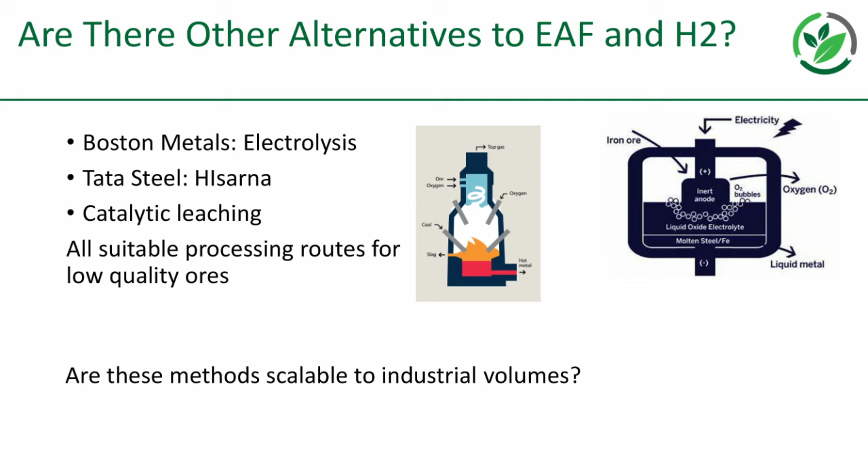We're not sure. HIsarna was trialled in the Netherlands, Tata Steel in IJmuiden, and it's now onto a second stage where they're going to build a semi-production scale one in India. And if that works, that could be rolled out within the UK and IJmuiden as an alternative to blast furnace. It also has a much lower carbon dioxide output, and then of course you can use carbon capture and storage to add to that.

But what I think would be a good idea is to use one of these small modular nuclear reactors and arc furnaces. If we can process the scrap to the level we need, we'll still probably need to top up with a little bit of iron, from HBI or something like that. What we could do is basically get a Trident submarine, take the power supply out because they last for 50 years, and are the safest housing - people have lived in these submarines for years without any problems. It's an all self-contained unit.

The government is trying to convince people to take on trials using them. Obviously it's very expensive, there'll be some subsidies to get them out there, but I'd like to see this maybe in Teesside or even South Wales or wherever. Having that actually power the arc furnaces, so we're not relying on the generic electricity supply that is dwindling and fluctuates because of the renewables, the wind power, photovoltaics, and a bit of natural gas and a bit of nuclear - so you've got your own sustainable power supply.

That could be used for hydrogen electrolysis as well, so there'll be energy to spare. You could then use that to power your DRI plant or your HBI plant, and also use it to kickstart the UK hydrogen economy as well. So something like that where you're using a lot of recycled material - you'd use your hydrocarbon wastes for your DRI plant as well, and use it for the gases that come off to produce your substitute for petrochemicals.

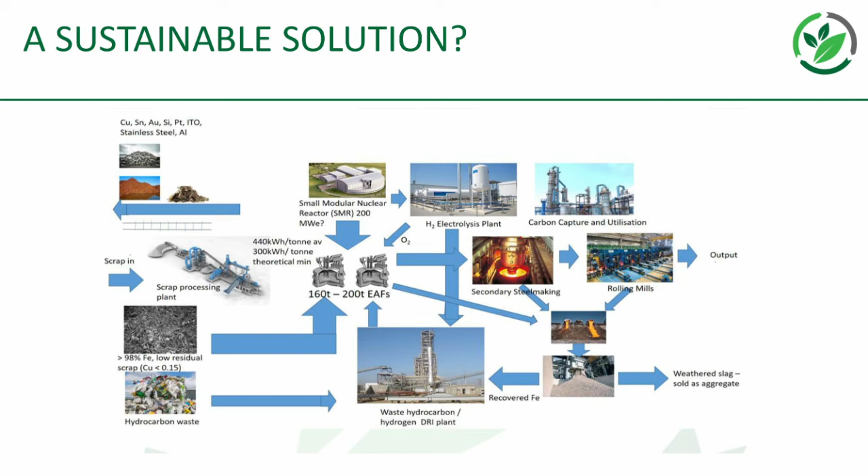So you've got Nissan up the road. Let's say somebody's Nissan car's a bit worse for wear, needs some new parts or whatever. The parts come back there for refurbishment, or recycling if you can't refurbish them. The stuff that can't be refurbished goes through the micro mill, produced into new steel. You minimise the amount of steel grades that you have, so it's much easier to produce the different components. It's all done on demand.

It will be much more expensive, but the long-term possibilities are better. Effectively, over time, you'll have millions of tons of steel in circulation from it - it could even be a 40,000 ton per year plant, very small, but it's always in circulation. It's always owned, could be owned by the steel company or the car company, or shared throughout the hub, where you have all of the support elements as well, and you've effectively got a localized system for providing the services that we need.

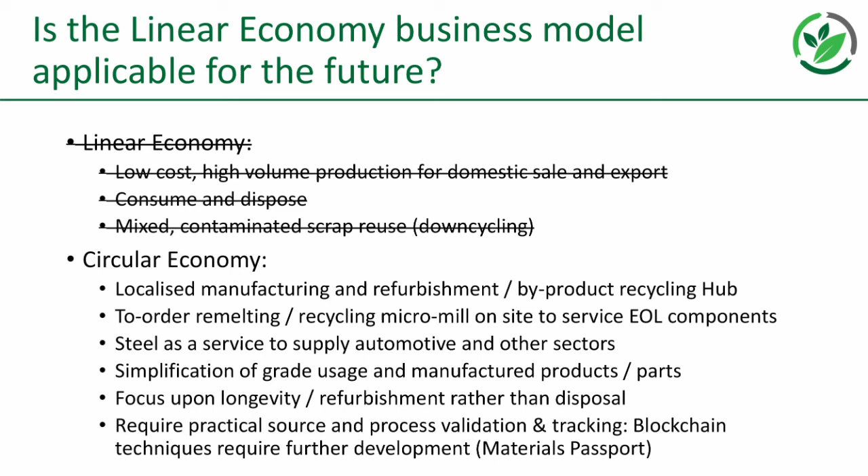You'd be able to track every single piece of steel. You'd know what was in it, how it was made, how many times it had been around the cycle - that sort of methodology. And why the Northeast?

Logistics - it's highly developed, high volume. We've got fantastic access, road, rail, and sea transport, raw materials and product transport. We might need to initially outsource some of these manufacturing capabilities that we don't have ourselves, but we have the raw materials, so rather than having to be reliant on another country to supply lithium or indium or other materials, we'd have it at hand, and we'd use that as part of a barter to get things made much more cheaply.

Energy - we've got a fantastic energy source here. There's the off-grid electrical network at Teesside as well. Carbon capture and storage - everything's going to be in close proximity to the North Sea oil fields if we want to do the storage side. I'm not a big fan of that. I'd rather see if we could reuse it and use it for producing new chemicals.

And then we've got the knowledge. Teesside, we've got a long history in steel making. It is quickly diminishing though, but there are still very knowledgeable people within the area who know a lot about steel making, who could be brought into such a project. We've got a lot of excellent engineers and people with various skills that can make this thing happen. I think that across the country it's been lost, but Teesside, and the northeast in general, we do still have a lot of those skills.

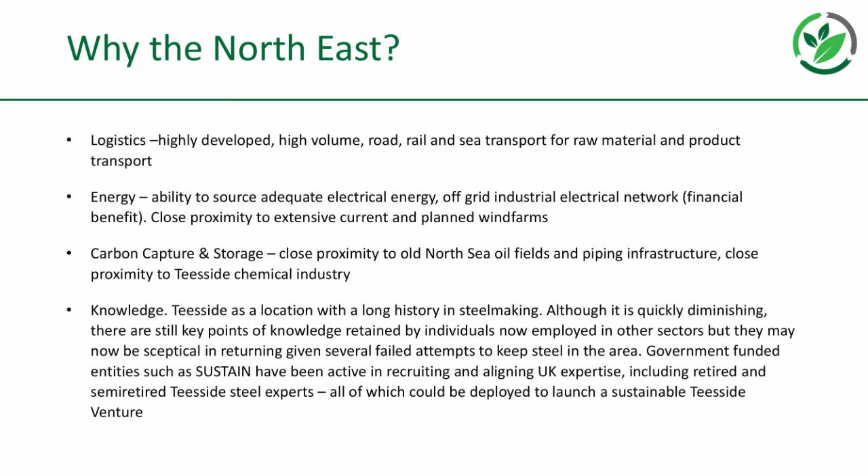So government funded entities like Sustain, we've been active in recruiting and aligning with these experts. We've been building a network of retired steel workers and people who've worked in chemical plants and similar industries, bringing them into the project to make sure the knowledge isn't lost. A lot of industries have gone from the northeast, and we need to make sure the knowledge doesn't go with it.

And then one last thing—I'm probably way over time, am I? Yeah, sorry, how far over? 17 minutes. Sorry, one last slide, I promise. Just getting back to energy.

I think we're making a massive mistake at the moment by cutting UK fossil fuel energy generation, doing it in a way that's preventing us from hitting the targets we need to make. We've got the energy crisis, imported electricity and gas supply, offshoring CO2, and we're increasing the cost of everything. Increasing the cost is going to increase the cost of research and manufacturing, which is going to increase the delays in actually getting to the targets we need to reach.

I think ultimately this 2050 target is going to be unreachable because we're cutting corners and not actually using the right energies. The monetary system, the dollar, is based on oil—it's all based on energy. Cheap energy is making things happen, that's why we are where we are today. If energy suddenly becomes expensive, everything else becomes expensive too. We won't be able to afford or develop the things we need, and we'll miss this target because of that extra delay.

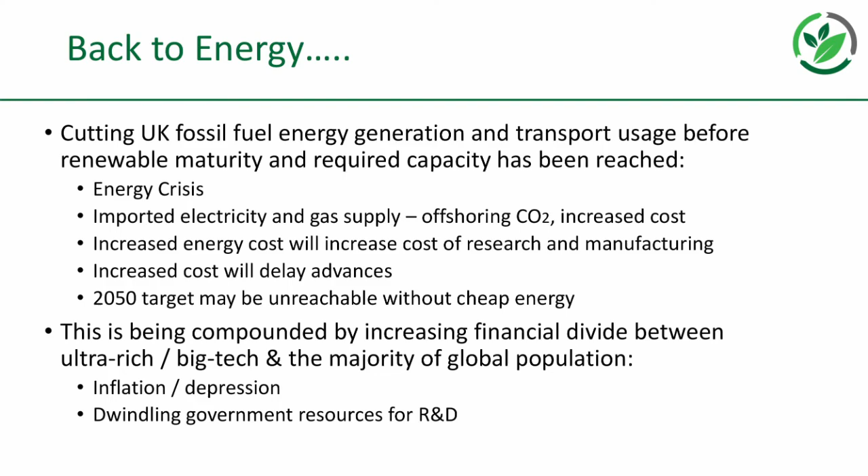I think that's also compounded by the increasing financial divide between the ultra-rich, big tech, and the majority of the global population. We've got this looming inflation and depression we're currently facing, and that's only going to dwindle the investment that UK governments and governments around the world can give to R&D to push the energy cause to stop us from destroying the planet. I don't need to extrapolate on that, but anyway.

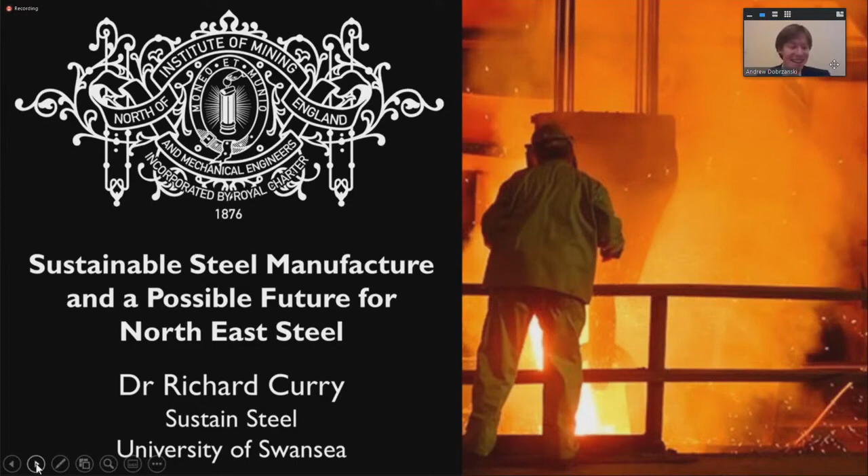All I'll say is my colleague is going to be over the moon that you're on about small modular reactors. They're definitely the way forward, and certainly some of our members have also been working on all sorts of things to do with algae. So we should definitely get in touch with them because it all sounds excellent. But hopefully I'll see you soon.

So yes, just to whip through the notices again. March lecture is going to be by Professor Jeroen van Hunen on modelling mine water heat extraction. Big topic at the moment, and one that our institute is fully behind. Not sure it could power a blast furnace though, but it'd be interesting to see.

April lecture, and hopefully a field trip as well, on the geotechnical engineering of the A1. Further details to come, but we're nearly fixed on that. And of course the main lecture - what better advert could there be than you've already mentioned, Professor Andrew Gallant, once this evening - come and meet the man himself in May.

And don't forget, we'll also be releasing details of our field trip to go and see the location of the discovery of the giant millipede. Again, look out for that. Lots and lots coming up, Steve. So I'll hand back to you.